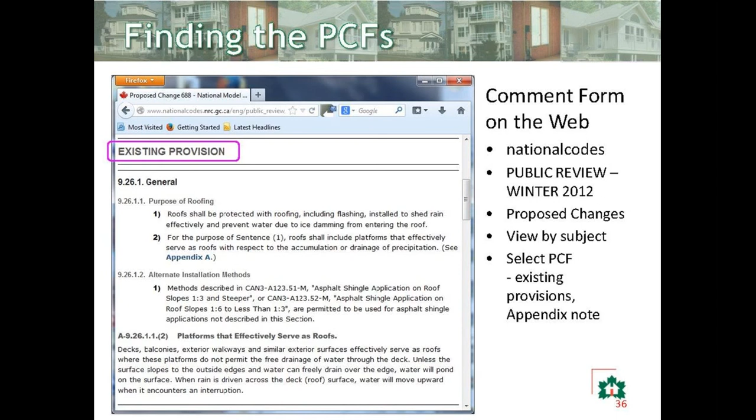In some cases, you'll also see a section titled Previously Approved Proposed Change. This comes where a proposed change has been approved through a public review earlier this cycle, but it hasn't been published in the code yet. So we're sort of building changes on top of changes.

So next, the change form will show the proposed change itself. They're presented in standard markup format, red crossouts, green underlines for new material.

You'll notice also that if there's a change to a related appendix note, that appendix note is provided on the same proposed change form as the referencing provision. You'll also notice that there are 2 sets of numbers for everything.

At the top on this form, you'll see 9.26.1 in black, and that's the existing code reference. And the numbers on the left in green and square brackets are the numbers that will apply to each of the provisions if the change is approved. So these would be the 2015 provision numbers. Where a provision is brand new, you'll only see the numbers in square brackets.

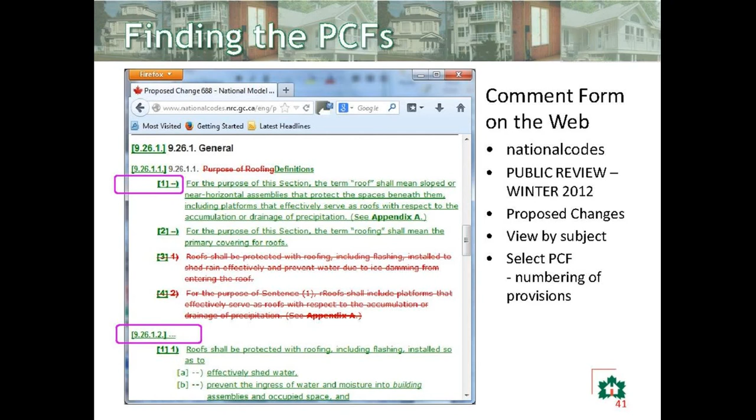Following the change itself is the rationale: identification of the problem, a justification or explanation of the solution that's being proposed, some information on cost and enforcement implications, and then an identification of who would be affected by the change.

And then at the very bottom of the proposed change form is the objective-based analysis. So if you're a real glutton for punishment, you can check and see what the new requirements are attributed to in terms of functional statements and objectives.

Introduction to the proposed changes, just a quick overview here. This list is a listing of all the subjects of proposed changes to Part 9. You don't need to memorize this. We will be posting the presentation so you can look at all this later. And we're not going to look at all of those changes today.

In terms of commenting on the changes, there are 5 options: support, support with comments, support with modifications, do not support, and no opinion. Now, as far as the standing committee is concerned, the first and last options aren't particularly helpful to them. It doesn't change anything in their discussion. So if you're going to provide comments, I'd suggest that you select from one of the remaining 3.

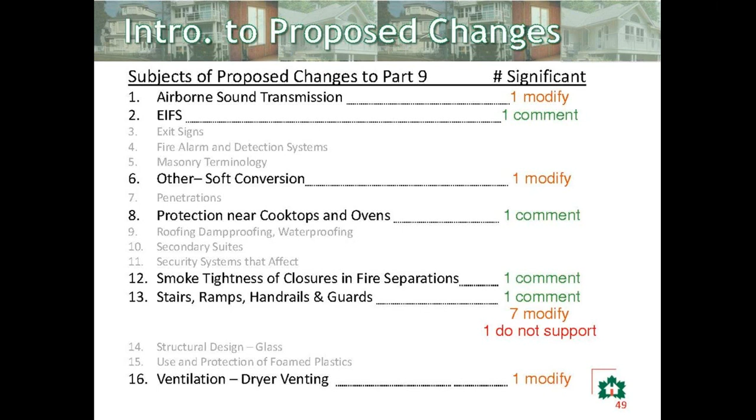I'm also going to mention one Part 3 change because it's referenced by Part 9. Specifically, Part 9 references an appendix note that's part of this change. And then finally, on combustible construction, there are 41 proposed changes on this subject, as I mentioned, provided in Parts 3, 4, and 5 of the National Building Code and also in the National Fire Code. We're really only concerned with 2 of those, so we'll just have a look at those.

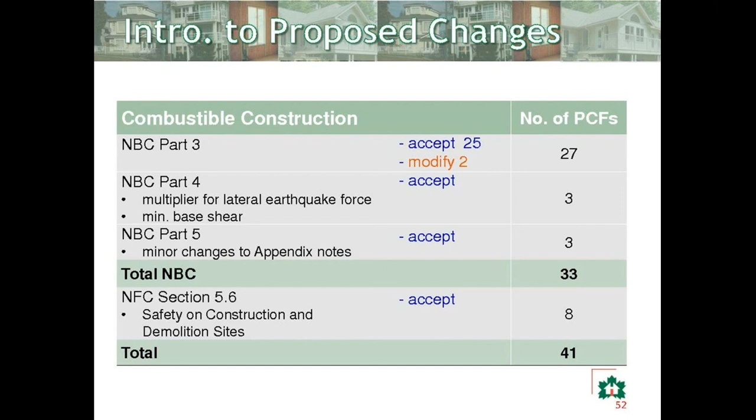So now into the nitty-gritty, or just about. I just want to take a minute and mention how the slides are formatted, just to help understand what's being presented. The text at the very top of the slide is the subject of the proposed change, and it should be the same words as the subject that you find on the code's website. Underneath that is a code reference, and again, it should be the same as what's on the website to identify the code reference for change. Then the proposed change form number and subject, again, mirroring what's on the website.

And then under that, I will identify the issue that's addressed by the proposed change form and the solution that's being proposed. I'll provide a little outline of what's in the change, identify the problems with it, in some cases suggest a revision, and then at the bottom of every slide is a link to that specific proposed change, so you can find those if you want to go direct to a particular change form.

So the first subject is airborne sound transmission. The problem that's addressed by the proposed change is that the current requirements that specify minimum sound transmission class don't address flanking sound. Trying to improve performance simply by increasing STC can be very expensive and often doesn't work very well.

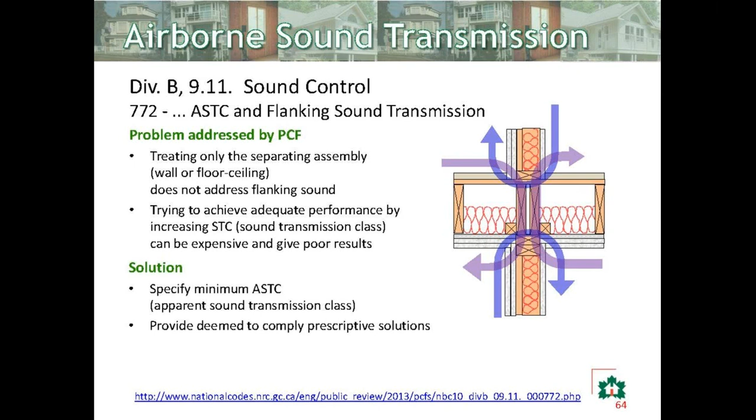So the solution is to specify a minimum ASTC, which is apparent sound transmission class, and to also provide some deemed to comply prescriptive solutions. So what the change does is it specifies required minimum protection to address flanking. In the general case, that's a minimum ASTC of 47 decibels, or a minimum STC of 50, which is in the code right now, plus some prescriptive construction criteria. For dwellings in houses with secondary suites, the criteria are a little less stringent.

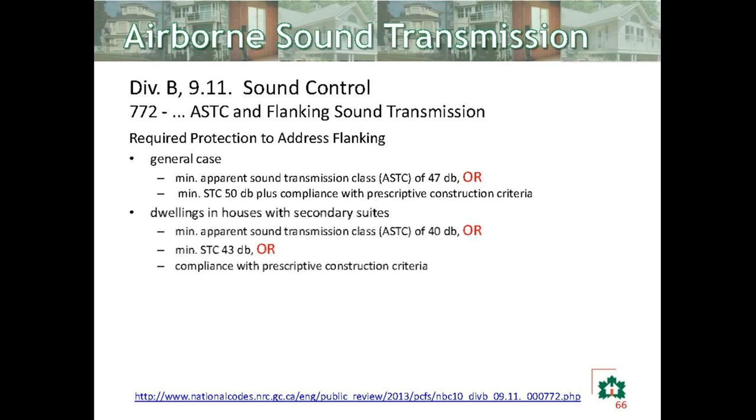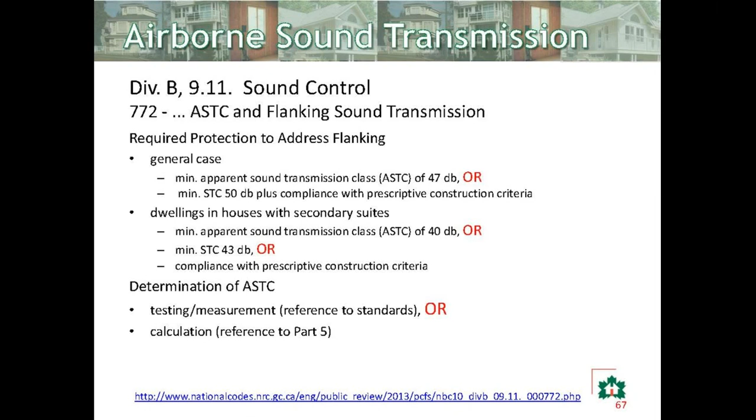The proposed change specifies how ASTC is to be determined. The options are testing, or what is called measurement in the proposed change, or calculation, which is essentially a reference to Part 5. The change states how to demonstrate compliance with an ASTC rating, which again can be through testing or calculation, or by constructing assemblies according to some prescriptive requirements that describe the treatment of flanking assemblies depending on what your separating assembly is.

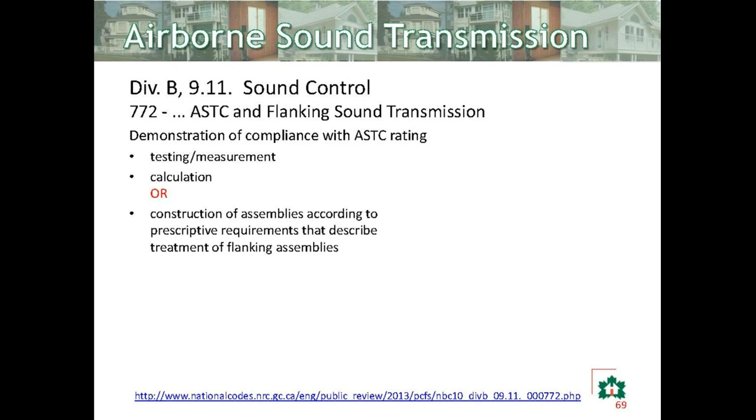So for example, if you have side-by-side dwelling units, your wall is your separating assembly, and if that assembly is a double stud wall and the subfloor is not continuous under that wall, then you don't have to do anything else. On the other hand, if you have a single stud wall and your subfloor is continuous under that wall, then you'll be required to add topping on the subfloor in order to comply with the ASTC requirement. The proposed change also includes updates to the appendix note to provide more information on flanking and on deemed to comply assemblies.

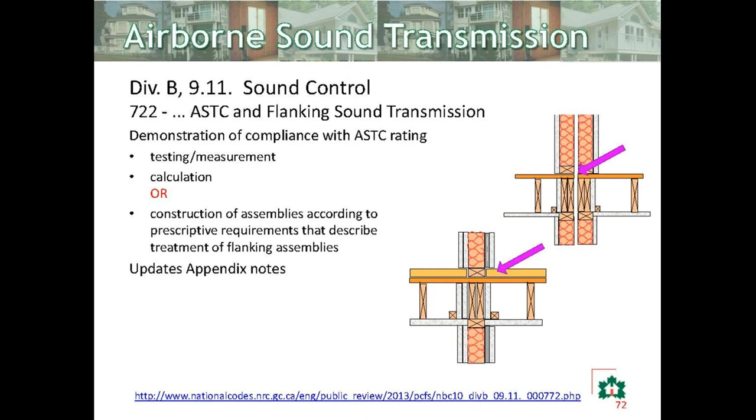So, what's wrong with the thing? Well, not a whole lot, actually. There was an awful lot of work that went into developing these changes, and considerable attention paid to comments from builders on the committee. The real difficulty is essentially editorial, but there are technical implications.

There are two issues with this one. The first is that in the requirements that provide the prescriptive construction information, the subclause refers to the topping and finished flooring complying with a certain table. When you look at the table, actually in some cases they require topping, in some cases they require specific finished flooring, in some cases there is no additional requirement for either. So it just needs to be clearer that it's topping and or neither. It's just really an editorial thing, but it can be confusing if it's not clear that it's one or the other or none.

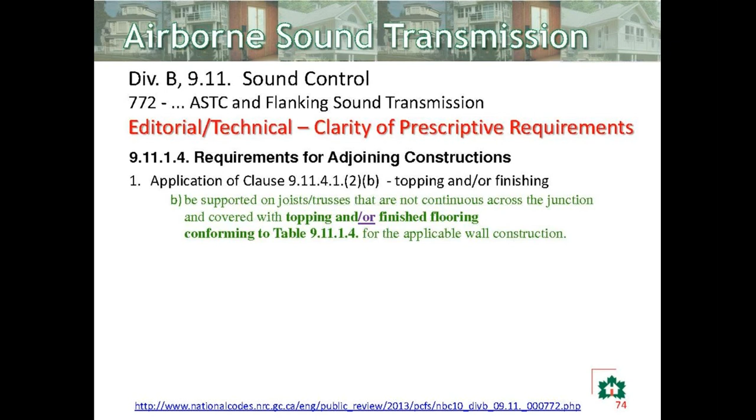The second issue is in the table itself that describes what needs to be done to the adjoining assemblies when your separating walls are W13, 14, or 15. Those are the numbers in the current fire and sound resistance tables, and those walls are double stud walls. The table provides instructions on what to do if your subfloor is continuous under the wall, but it doesn't say what to do if there's no continuous subfloor. So it raises the question of, well, do you have to do nothing, or is this not even permitted? So that just needs to be clarified. Makes a big difference.

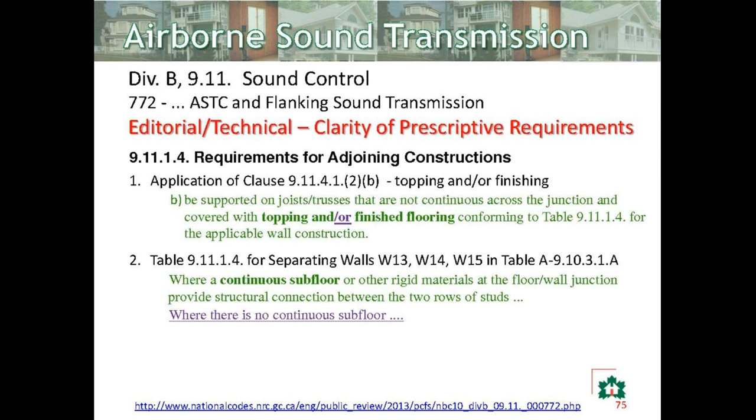The next issue I'd like to look at is exterior insulation and finish systems. At the moment, EIFS is not recognized in Part 9, so the solution proposed is to provide some requirements.

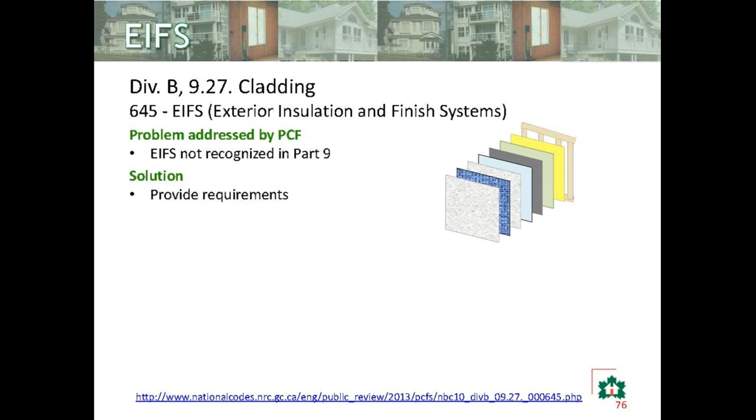The proposal would accept EIFS as cladding on wood frame, masonry, steel stud, and cast-in-place concrete walls, and it requires compliance with a number of other subsections in the code or Part 5.

There's a provision under 9.27.2.2 on minimum protection that indicates that if you install EIFS according to a new subsection 9.27.13, that installation is deemed to provide a capillary break.

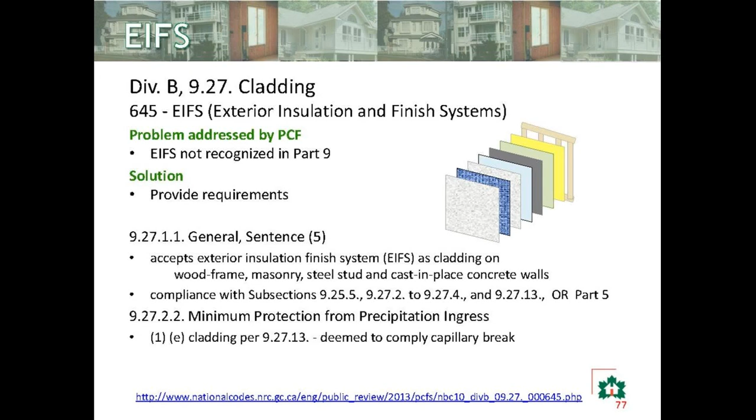And if we look at 9.27.13, the proposed change indicates that EIFS can be used under Part 9, provided it complies with the ULC standard, and also provided there's a drainage cavity. It then specifies a number of standards that must be followed for materials, design, and installation.

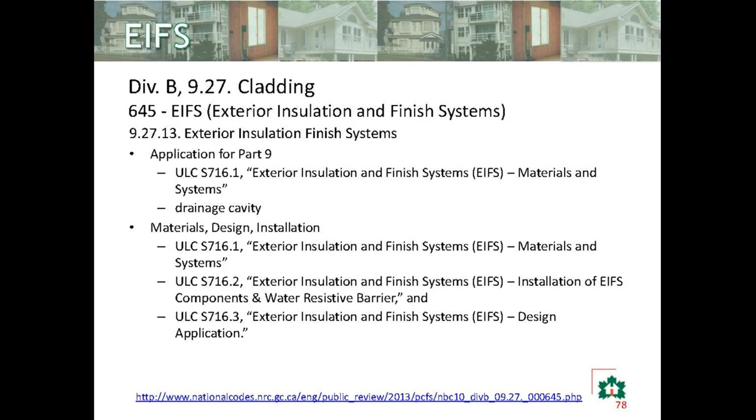So, concerns with this have to do with the performance of that drainage cavity. The provision says that the cavity has to be a minimum depth of 6 millimeters with an open area of not less than 13% of the full area of the EIFS panel.

Now, the reason we're concerned about this is that if we compare this with all the other drainage cavity requirements for other types of assemblies, the criteria are quite a bit more stringent. Rather than 6 millimeter cavity depth, all the other ones are at least 10 millimeters. And for a simple drained and vented airspace, the code currently requires that be over the full area of the wall. If it's drainage material, we require a minimum 80% open.

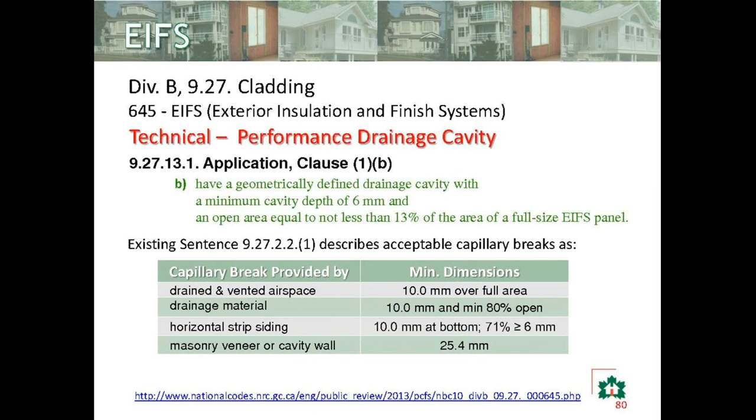So we'd like to be reassured that this 6 millimeters over 13% is actually going to provide adequate performance, especially in cases of warmer, wet climates, such as coastal British Columbia.

If we go back and look at the IRC Industry Consortium report on moisture in envelope systems, there are some concerns raised about the performance of EIFS in warm, wet climates. So we just need a little reassurance there that we're going to have minimum acceptable performance. Another leaky condo issue we don't need.

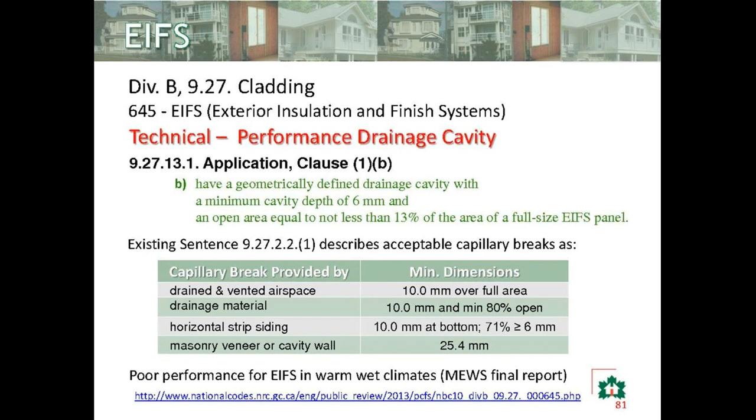The next subject is under this really informative heading of Other. There are quite a few proposed changes under that heading.

One of them is soft conversion. Every once in a while, the Code Centre gets an inquiry from someone saying, I install my studs at 16 inches on center, and that's further apart than what the code says. Because the code's in SI, and it's done a soft conversion of 16 inches to 400 millimeters, and 16 inches is really 406 millimeters. So the solution being proposed is to add an appendix note to identify deemed-to-comply imperial dimensions.

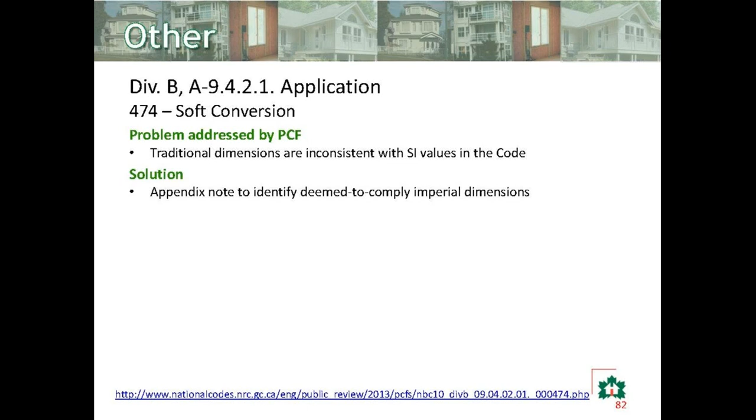This appendix note would be referenced from 3 different provisions in Part 9, and it currently addresses dimensions that are acceptable where these are hard conversions from imperial measures, but it only addresses spacing between framing elements, like studs.

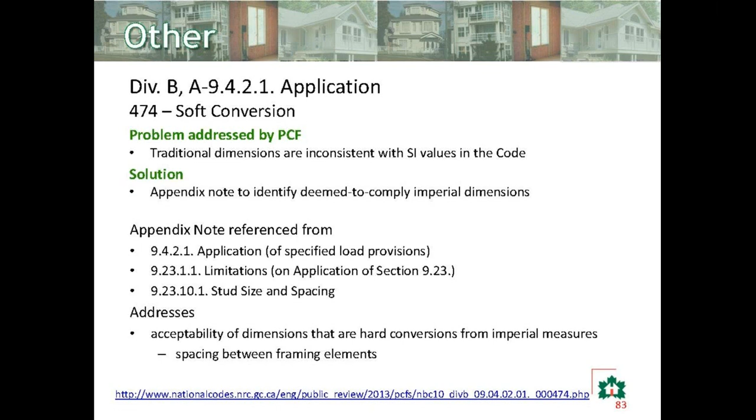So the concern we have with this, we actually have 2 concerns. The first is administrative. The fact that the information is provided in the appendix note means it's not enforceable. So it's useful information, but it has no legal standing when it's in the appendix.

The second is a question of scope. The proposed change addresses spacing of framing, but it's not clear if that includes strapping and furring. And it doesn't address other things such as the spacing of elements that depend on the spacing of framing, such as ties for masonry veneer, or dimensions that depend on traditional component dimensions, for example concrete block, which has implications for foundation thickness and also for spacing of reinforcing.

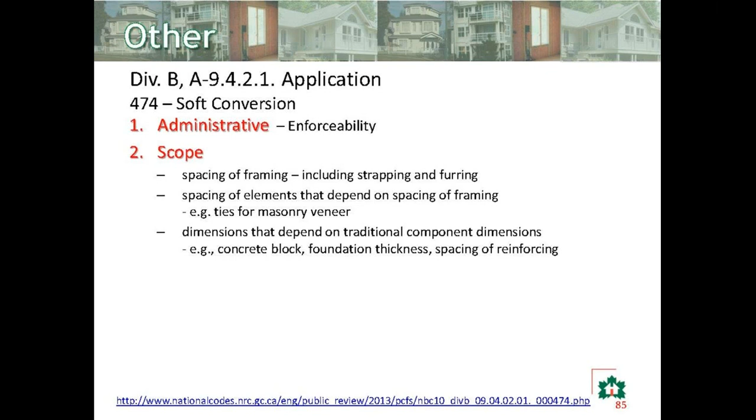The proposed change has a little conversion table in it to identify hard conversions that would be acceptable, but the table only goes up to 24 inches. With a quick review of Part 9, I've identified values up to 72 that I think the change should address.

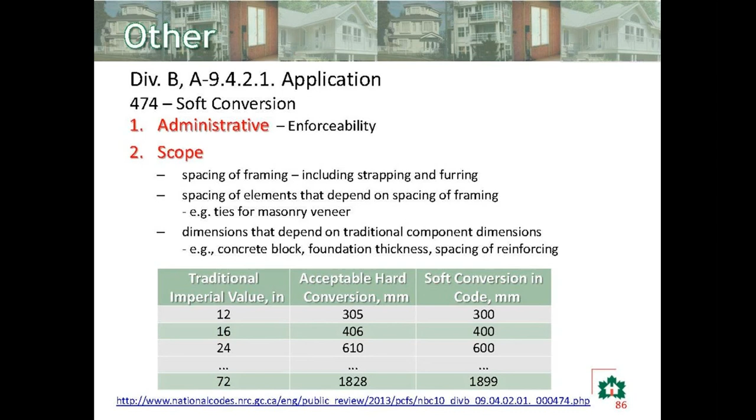Next issue is protection near cooktops and ovens. This issue arose as a result of problems with interpretation in the application of the existing requirement.

Just to give you a little background on that, this illustration shows a standard kitchen cabinet setup. I've actually shown 2 kitchens back to back against a common wall just so that my illustration doesn't get too cluttered up. So we've got standard 3-foot high lower units, 29.5 inches clear to unprotected cabinets.

Of course, we generally protect the cabinets with a hood, and then we can bring the cabinets down to 24 inches. A certain authority was imposing the unprotected cabinet height on microwave ovens installed over cooktops, which meant these were installed almost 5.5 feet above the floor. Obviously not very practical and actually rather dangerous.

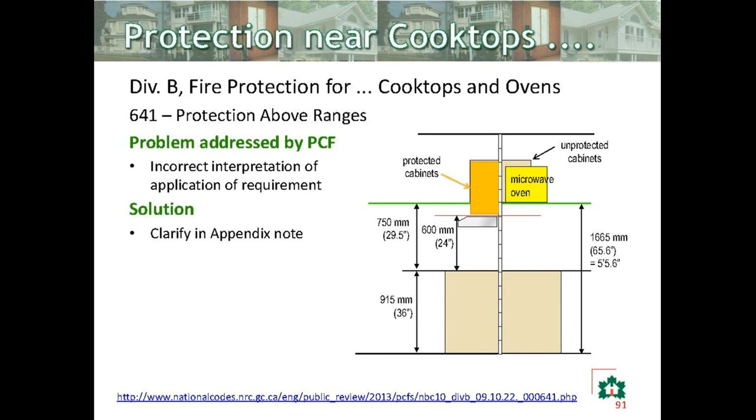So the solution is to clarify the application of the requirement in an appendix note. The note, as written, clarifies that the clearances specified in 9.10.22.2 only apply to combustible framing, finishes, and cabinetry. They don't apply to microwave ovens installed over cooktops. The appendix note explains that these microwave ovens should only be installed according to the manufacturer's instructions, and if the instructions include installation over a cooktop, then the oven will have been tested accordingly.

So we don't need any special requirements for this, just follow the manufacturer's instructions. And we would suggest supporting this proposed change because it really does clarify some problems that some builders have been running into.

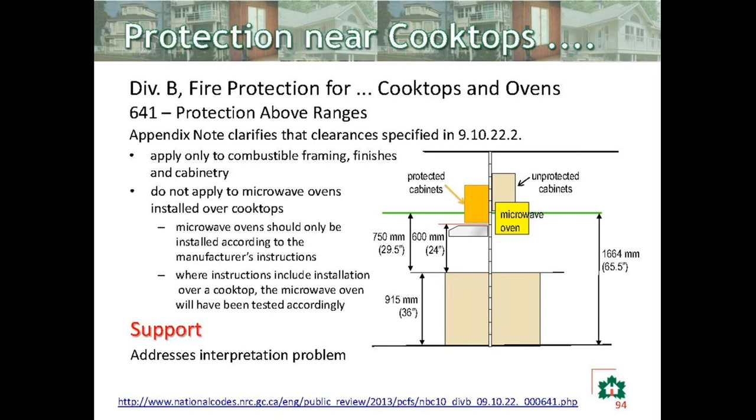Next subject is smoke tightness of closures. Right now, the code requires fire dampers in ducts and air transfer openings that run through fire separations. That's all very well and good, but actually smoke is a bigger problem than fire. So the solution proposed is to require smoke dampers in air transfer openings.

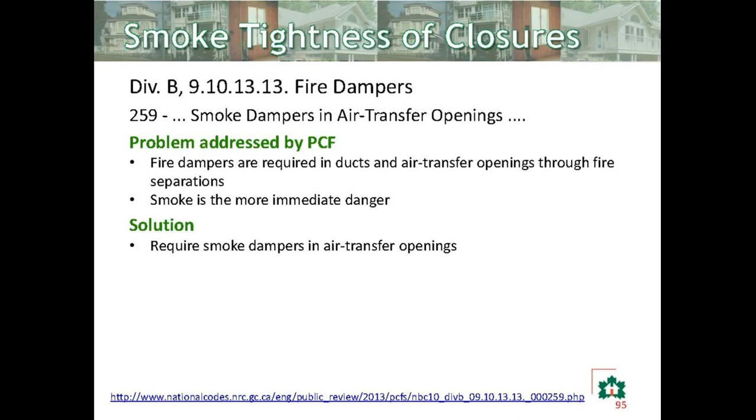So there's a revision to Part 9 that references Part 3 for fire dampers. At the moment, those requirements are in Part 9. We're just taking them out of Part 9 and referring to the requirements in Part 3. There's no technical change there.

Secondly, the proposed change references Part 3 for smoke dampers in air transfer openings through fire separations. That's the new piece. It also provides an appendix note to make clear that smoke dampers are not required in ducts in Part 9 buildings. They are required in Part 3, so you just want to make sure that people are clear that the dampers in ducts are not required in Part 9.

The issue here is really a question to you, and we're hoping you might be able to help us out as to whether there's any real issue here or not. I don't know whether air transfer openings are even used anymore. And if they are, does the code need a definition for these so that we know what we're talking about and what the requirement actually applies to?

Stairs, ramps, handrails, and guards. There are quite a few changes here, and quite a few of them we have suggested comments on.

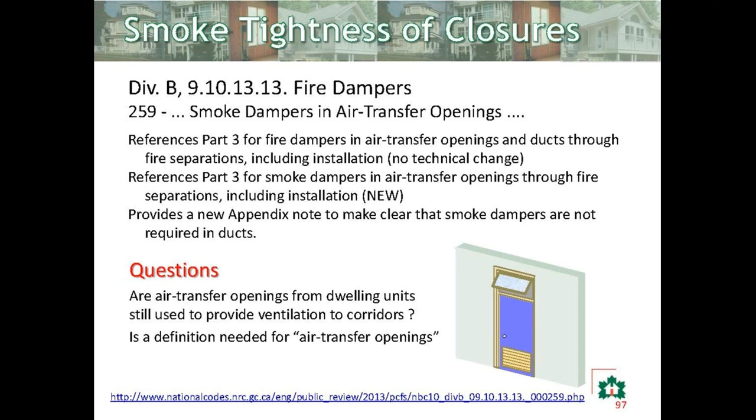First one is a defined term for flight. There are a number of requirements that refer to the length of stair flights, so we need to be clear on what is meant by the word flight. So the solution is to provide a definition. The proposed change actually provides not just a definition, but also an appendix note with an illustration.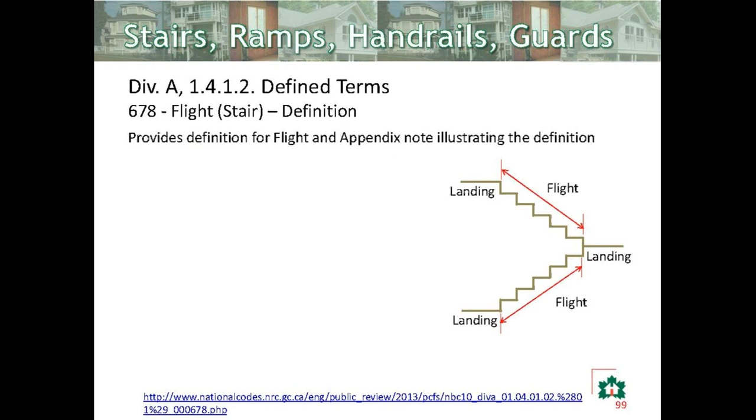This is great, except we still don't really know what a flight is, because the illustration doesn't show any nosings on the treads. So if you have nosings, does the flight include the nosing on the top at the landing? Does it include it on the bottom tread? It's not at all clear. So you don't really know where the flight starts and ends, so you don't know, for example, where a handrail has to start and end.

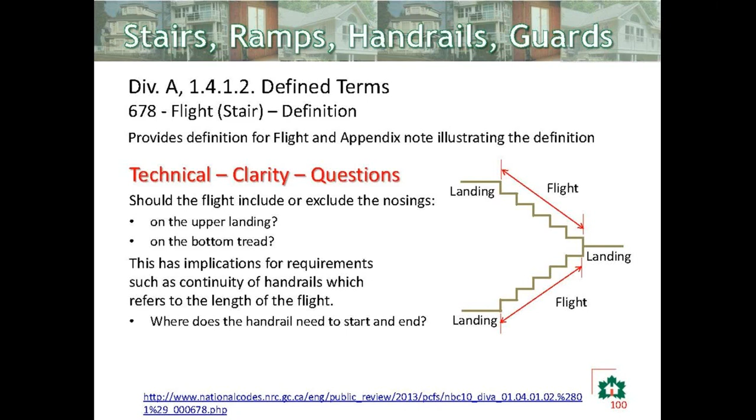So we're raising that issue in the comments. Next, I'm going to talk about two proposed change forms at the same time because the difficulties with them are the same. The proposed changes are meant to address consistency in terminology, identify where the depth of a tread is to be measured, and one of them addresses the subject of deeper angled treads at the base of a mixed run stair, which is not currently allowed.

So the solution proposed change would make the terminology consistent, specify the dimension of the treads at the walking line on the inside of the curve, and allow deeper angled treads at the base of the stair.

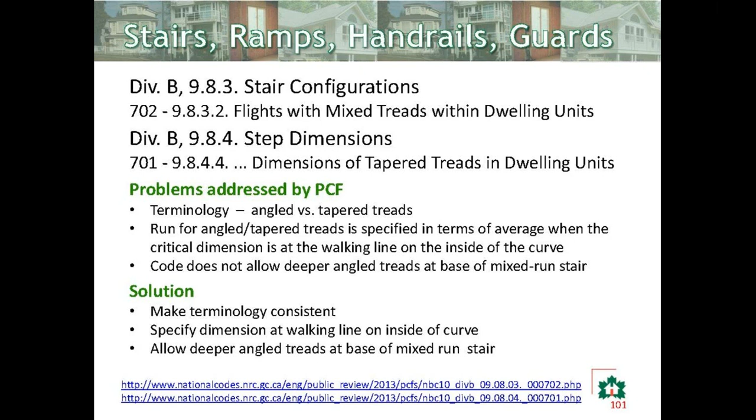So for this first change, flights with mixed treads within dwelling units would require uniformity of tapered and rectangular treads in a mixed run to be measured 300 millimeters from the center of the inside handrail. And for tapered treads at the bottom, it simply allows the tread of the tapered tread to exceed the run of the rectangular treads.

For the second proposed change form, 9844, the change would specify a run at the narrow end of the tread, again specify minimum run, measured 300 millimeters from the center of the handrail at the narrow end of the tread, requires consistent angle, and it talks about measurement of tolerances.

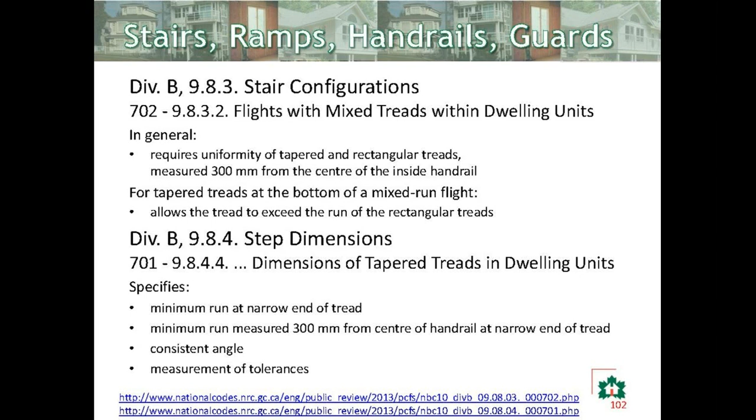The difficulty here is really where to measure. The changes specify 300 millimeters from the center of the handrail, but they refer to handrails on the inside of stairs that are curved and have mixed runs. The problem is there's no requirement right now to have a handrail on the inside of the curve, so they're assuming a proposed change to do that will be accepted, and we have some difficulties with that. The other issue is there's an exception for winders, so if you have a flight with winders, you're allowed to have the handrail on the outside.

There may be no handrail on the inside from which to measure. So the suggestion is that the two proposed changes be reworded so that the tread is measured from the handrail where there is one, and measured from the end of the tread where there isn't. There's quite a bit of duplication in the requirements, so where that duplication appears, we're suggesting you just refer to the previous sentence instead of restating things all over again.

You may notice on the way by that there's also a proposed change for 9.8.4.3 dimensions of tapered treads in public stairs that reads the same as the change we just looked at. But in this case there's no problem, because for public stairs that are curved, you have to have handrails on both sides anyway, so there will be a handrail to measure from.

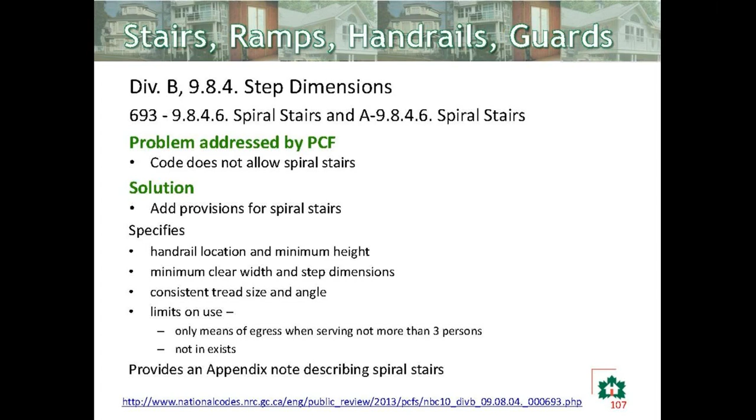The problem with this, first, is a matter of consistency. The task group that developed the proposed changes was quite adamant that the measurement of tread depth should be at the walking line, but for some reason when they got to spiral stairs, they're measuring at the narrow edge. If it's so important to measure at the walking line, I think they should probably do that for spiral stairs as well.

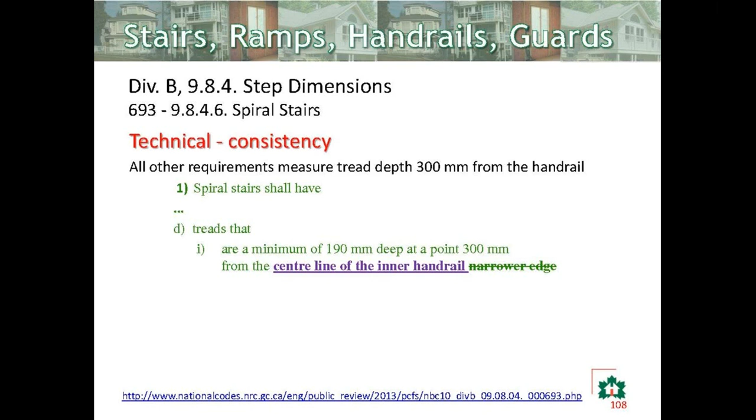The second problem is that the appendix note describes a typical structure of a spiral stair rather than the properties that affect safety and use, which is what the code is really concerned about. So the appendix note as proposed says that the spiral stair is a stair with a circular plan having uniform treads that radiate from and wind around a central post or supporting column.

Obviously you could have a curved stair that's structurally built the same way, or you could have a spiral stair that meets all the requirements in the body of the code that doesn't have a central column. So that structural piece of information isn't particularly helpful. I think if they're going to have an appendix note to describe what these are about, they really should be talking about the code criteria rather than the structure.

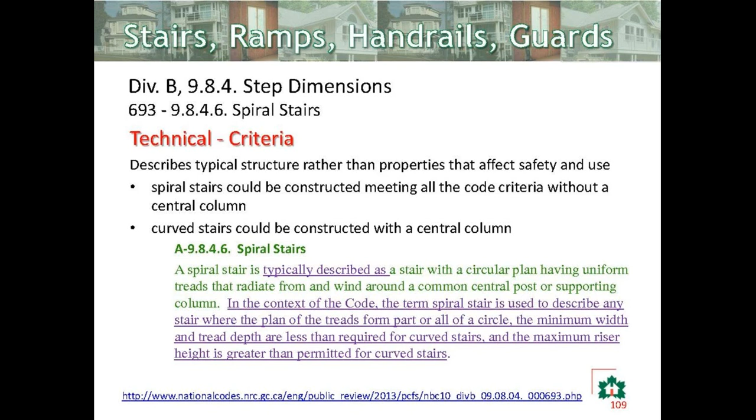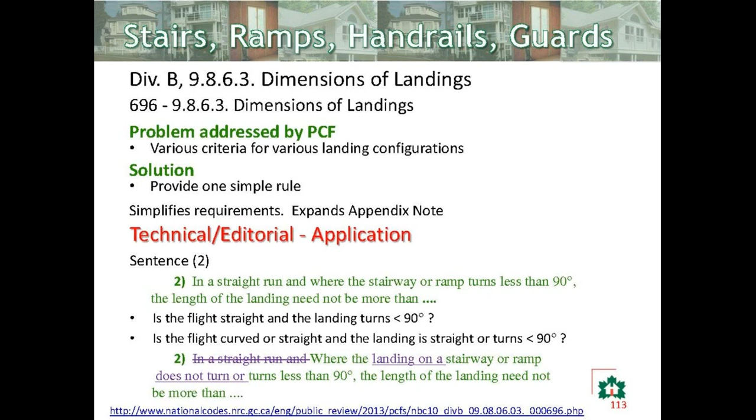Again, kind of an editorial issue, but major technical implications. This becomes very confusing very quickly. The way the requirements are written, sentence 2 on the path of travel is an exception to sentence 1,

which is a sentence that specifies the number of handrails required. So it suggests that you're allowed to put a handrail not more than 750 millimeters from the path of travel instead of handrails at the sides of the stair or ramp. I don't think that's quite what they meant to do. And if it's okay to have a handrail down the middle of a stair or not on the edge, which may be quite reasonable for an exterior stair, then why can't you do that for stairs serving single dwelling units?

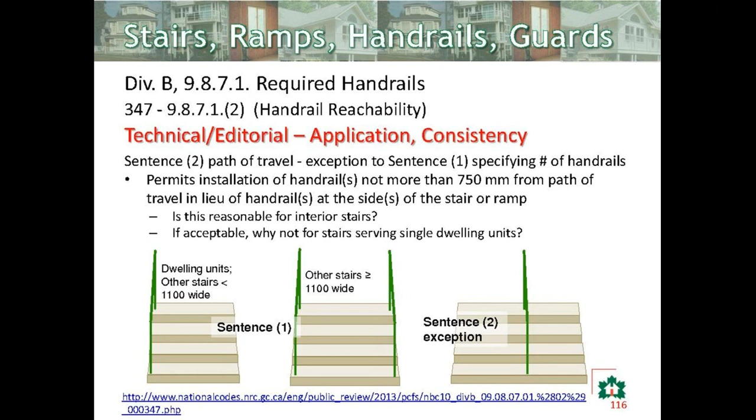The second difficulty is this term 'direct path of travel.' There'll be cases where the most direct path of travel might actually be diagonally up a stair. Obviously, that's not what they meant. If you imagine a curved stair, a direct path of travel might take you from one side of the stair to the other and back again.

So I think there's a little problem with the wording. The appendix note in Part 3 refers to the natural path of travel, which is probably a better description of what they're trying to get at.

If we look at the Part 3 requirement, and keeping in mind that the committees tried to eliminate differences between Part 3 and Part 9, the requirement starts by specifying that you have to have handrails on 2 sides. Remember, this is public stairs from Part 3. Sentence 3 would require additional handrails, so this is in addition, not instead of, as the Part 9 requirement reads.

Their sentence 4 would require the handrails, again, along the direct path of travel. That term's problematic. But when you look at the appendix note, it refers to natural path of travel, and it also suggests that the handrails are only required on the natural path as opposed to in addition, and it refers to stairs to and from the building, which makes one wonder if this is really only supposed to apply to exterior stairs, but that's not what the requirements say.

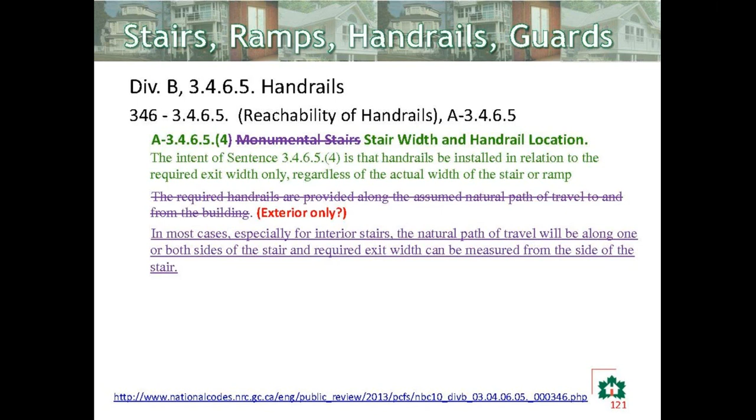One might note that for interior stairs, you'd expect the natural path of travel to be toward the side of the stair, and so you can measure your exit width from the side. And where you're talking about exterior stairs, you might have handrails just down the middle somewhere, and you may not need handrails on the sides. Again, the requirements are not clear, and they need to be made clear.

And a final observation is that by installing a handrail somewhere within the stair, you're actually defining a path of travel. So a whole number of issues here that I think warrant some further thought.

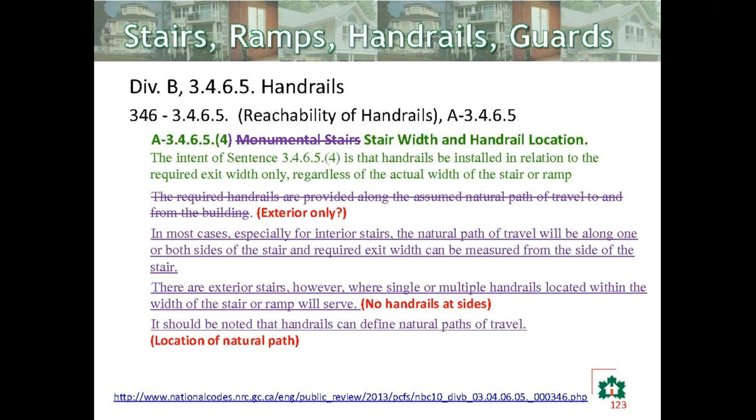This next proposed change is the one that caused problems in terms of measurement of your tread depth relative to the handrail. This is the change that would require the handrail to be installed on the inside of curved stairs and stairs with mixed treads. And it also provides, as I mentioned, an exception for winders, so you could have the handrail on the outside of the stair.

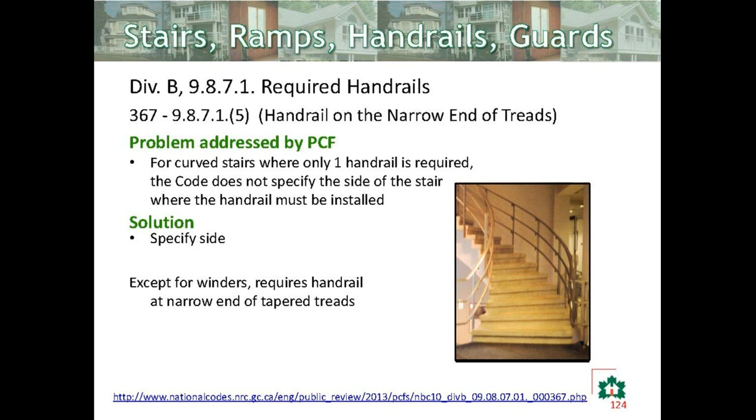So we would support the exception to allow the handrail to be on the outside for winders. You can put the handrail anywhere you want, as far as we're concerned. But there are problems with the justification and the costing on this proposed change. The justification only refers to consistency of tread depth at the walking line. Now, for a curved stair, the tread depth at the outside of the stair is going to be consistent, just the same as it should be consistent anywhere.

So the rationale for requiring the handrail to be on the inside just doesn't apply. For costing, the proposed change doesn't identify any cost implications, but you can imagine that if you have a case where you have a wall on the inside of the curved stair and a guard handrail on the outside, on the wide side, this change will actually require you to add a handrail on the inside. So there will be cost implications, and those should be recognized.

Continuity of handrails. The requirements at the moment allow breaks in handrails at doorways, obviously on landings. Although I was in a building recently where there was a doorway on a winder tread, so you never know. Breaks at newels, at changes in direction, and for dwelling units and houses with secondary suites, you are also allowed to break your handrails at the landings.

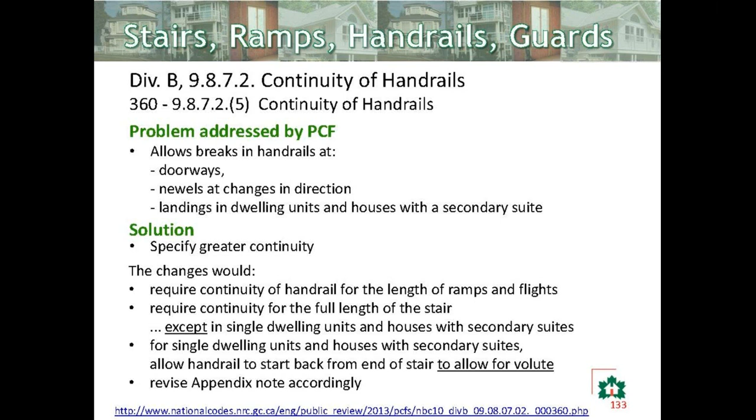Problems with this, for stairs other than single dwelling units or houses with secondary suites, we've identified problems with the application of the requirements, the justification, the costing, and also the attributed objectives. For the application, as written, the change would require continuity at landings where there's a change in direction, but not for landings that don't turn, which doesn't seem to make a lot of sense. If you want continuity, you should have continuity.

In the justification, we find that the current wording of the requirement is actually consistent with the intent statement, which is to limit the probability of unexpected discontinuity. And I would expect newel posts at certain places on stairs. So if we're going to change the requirement, we also need to change the intent, and that hasn't been done.

On costing, again, it's this issue, changes in costs have not been recognized, and again, we have a situation that the requirement would require an additional handrail where there's a wall on the inside of the stair and a guard on the outside.

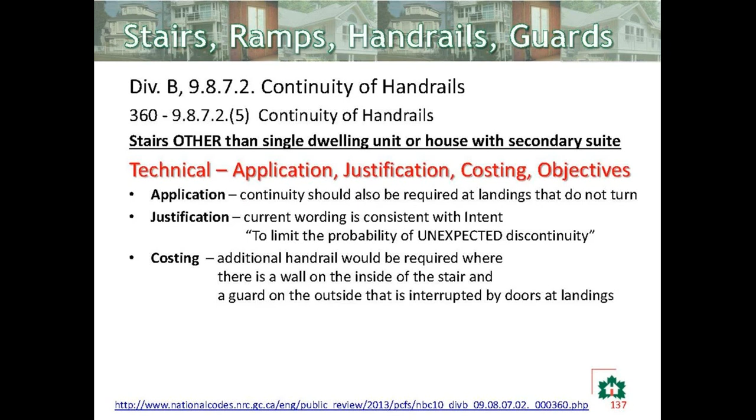And objectives. This proposed change, there's a new attribution to the barrier-free objective and the functional statement that relates to access and circulation in the building. Now, both the objective and the functional statement have references to other provisions for limitations on the application.

And if we look at those, we find that this objective and the functional statements do not apply to detached houses, semi-detached houses, houses with secondary suites, duplexes, triplexes, townhouses, row houses, and boarding houses. So to all of a sudden apply these objectives and functional statements to cases other than single dwelling units and houses with secondary suites creates an inherent contradiction within the code. So that is really problematic.

You might also recall that there's a provision in Section 9.5 that says that if your building doesn't have an elevator, then you don't have to provide a barrier-free path of travel anywhere except at the entrance level to the building. And if you've got a split entry, you don't have to provide a barrier-free path of travel anywhere. So, in fact, in terms of barrier-free path of travel, those objectives and functional statements also would not apply in these buildings. So we've got to sort out this whole issue of where barrier-free does or doesn't apply in Part 9 before we start attributing this objective and functional statement to any provisions in Part 9.

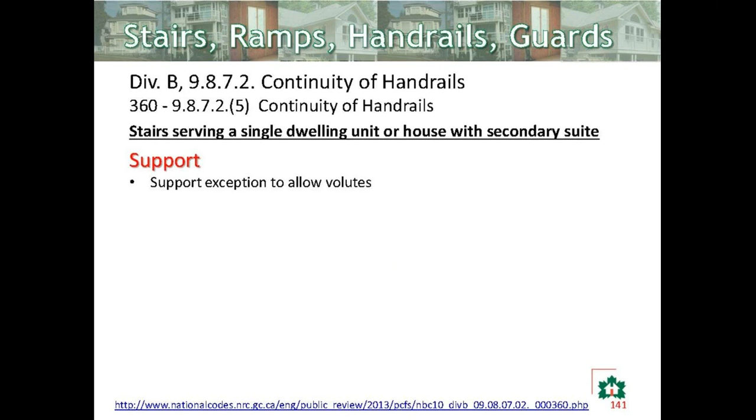And we suggest that this really needs to be dealt with at the policy level by the Commission. So we would support the change to allow volutes in single dwelling units and houses with secondary suites, but we still have trouble with the criteria and the justification and the costing for other aspects of the proposed change.

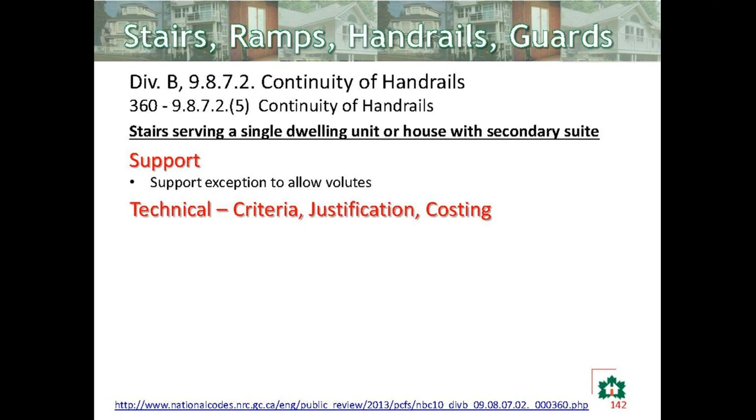This is a question of consistency with the intent, and the current requirement is consistent with the intent to limit the probability of unexpected discontinuity, and again with costing. If you can have a break in your handrail at a newel post, you can put the newel post on the inside of a stair with a winder, and that's fairly straightforward. But if you're not allowing a newel post in the flight, you either need a continuous handrail on the narrow side, which is complicated and costly to build, or install it on the outside, which makes the handrail longer and costs more. None of that is recognized in the proposal.

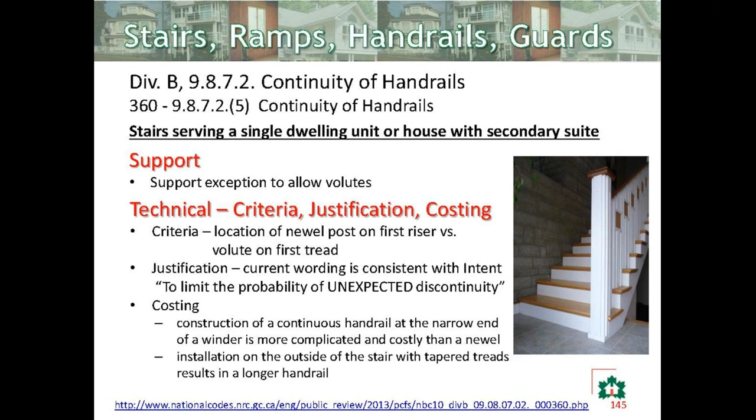So we're suggesting that the exception for newel posts at changes in direction be put back into the requirements, and that the provision referring to newel posts and volutes be revised so that it refers, in both cases, to installation on the bottom tread.

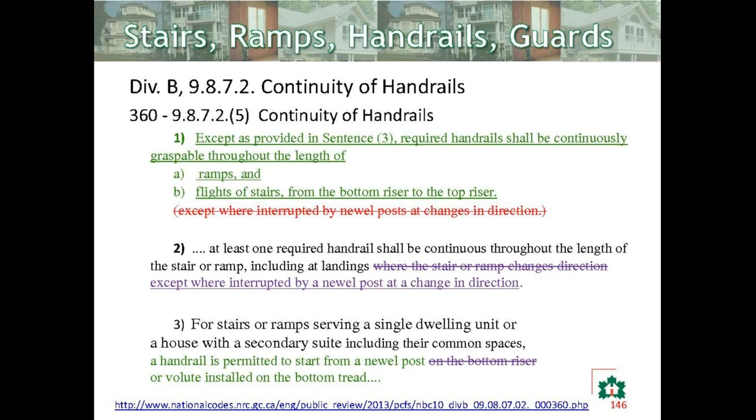Design of guards not to facilitate climbing has been a real contentious issue for quite a while. The problem with the current requirements is there's no justification for them, and they have a real adverse impact on design freedom and on the industry that manufactures guards. So the solution is to limit the application of the requirement and remove the prescriptive criteria from the code.

The proposed change would apply the requirement only where the difference in height between floor levels is more than one story or more than 4.2 meters, whichever is less. It would also update the appendix note accordingly and incorporate the information on the deemed-to-comply solutions currently in the body of the code into that appendix note.

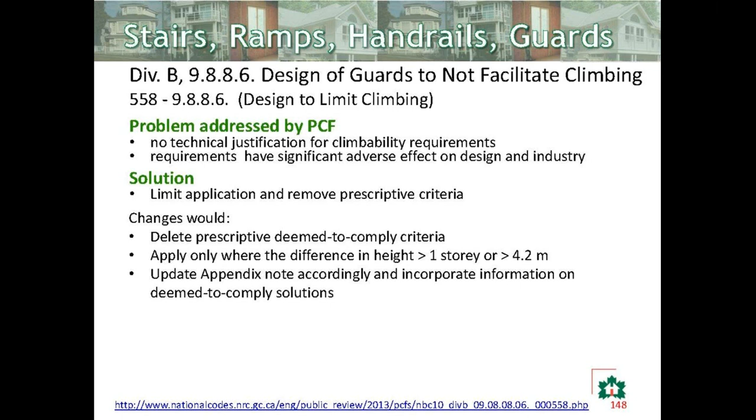It's not perfect. As I said, there's really no information to justify any requirement at all, but people seem to be nervous about taking the requirement out completely. Still, it's a definite step in the right direction, so we'd suggest it be supported, and we can work on it further in the future.

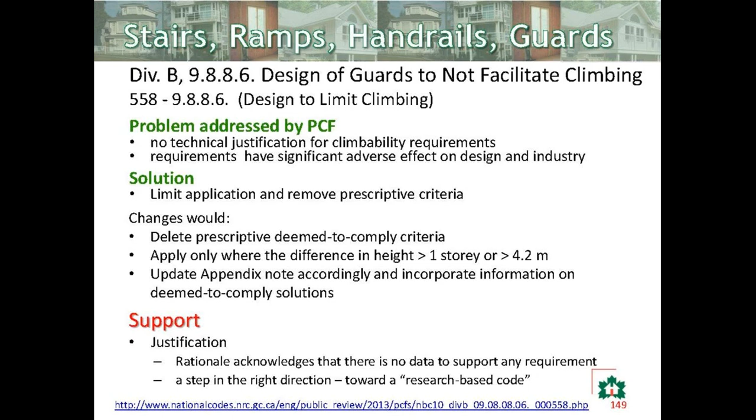The final proposed change to Part 9 we'll look at is venting of laundry drying equipment. At the moment there are no requirements in Part 9, and there have been concerns about high humidity if the dryer is vented to the interior, particulates released into the air, and fire hazards if the ducting isn't cleaned. So the proposal is to provide requirements specifying that discharge has to be to the outdoors, with independence of the ducting.

Ducts have to be accessible for cleaning and corrosion resistant. Where there are multiple installations, you'd need a common duct with a central exhaust fan, a lint trap, and make-up air according to 9.32.

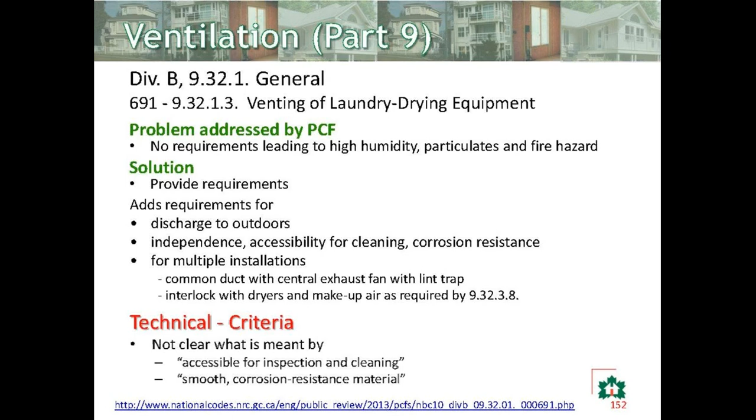There are no really serious problems with this, but it's not quite clear what is meant by accessible for inspection and cleaning. I'm concerned someone will say you've got to be able to see the outside of the duct as well as the inside, which is obviously impractical. It's also not necessarily clear what is meant by smooth, corrosion-resistant material. So the suggestion is to take inspection out of the proposed change.

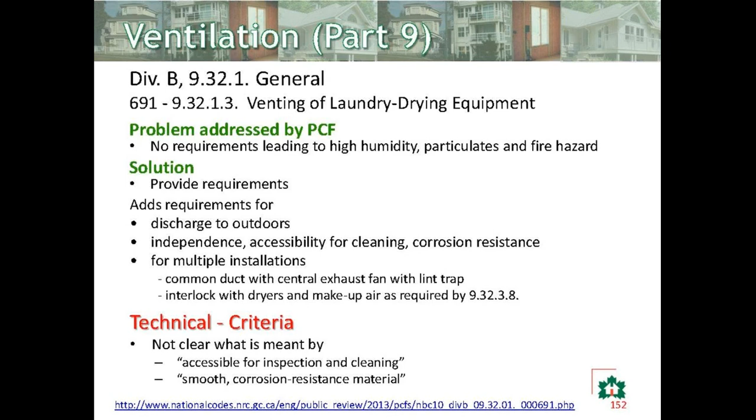If the duct is accessible for cleaning, it's probably accessible enough for inspection. An appendix note might be useful to indicate what is acceptable dryer ducting, and to note that plastic ducting is still acceptable for connecting dryers to the galvanized metal.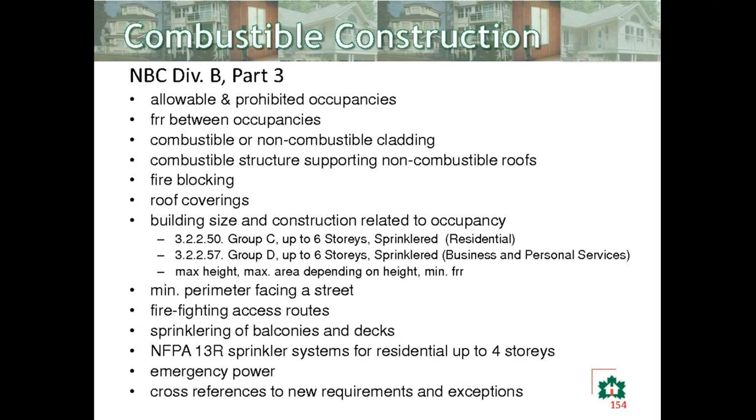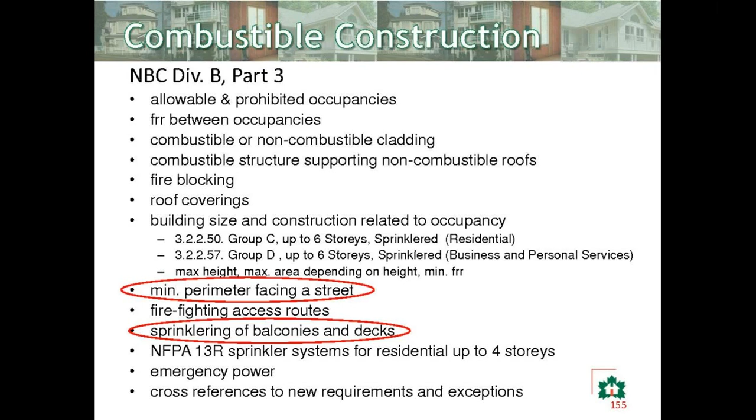I want to look at two: one on minimum perimeters and one on sprinklering. At the moment, where a building is required to face a single street, there's no indication of how much of the building has to face that street. So the proposal is to specify a minimum value of 25%. I understand CHBA is doing research to see whether this is unnecessarily stringent or acceptable, so if anybody has information on that issue, please pass it on to CHBA.

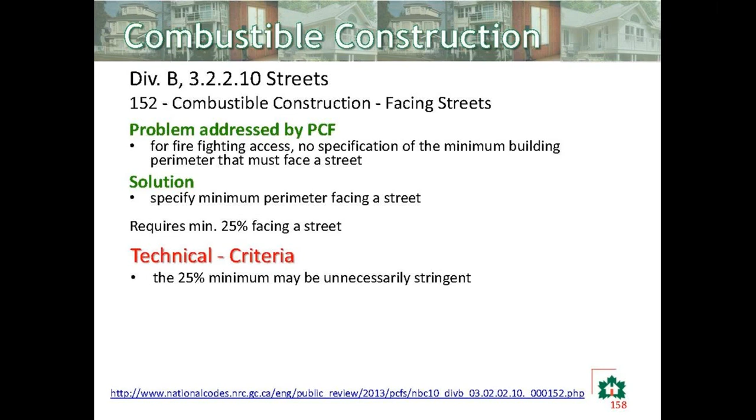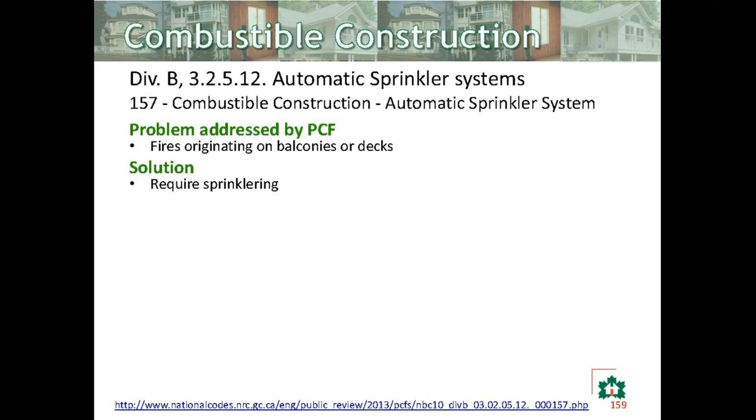The second proposed change has to do with sprinklering, addressing fires that might originate on balconies or decks. The solution is to require sprinklering where the balcony or deck is greater than 610 millimeters deep. My concern is that the application is too broad.

If you're talking about a roof deck where the higher structures are only enclosures for elevator machinery or similar, I'm not sure you really need sprinklers, especially if the cladding is non-combustible. Similarly, if there are no overhanging structures or soffits, I'm not sure this is necessary. Or if there are overhanging structures but they're a certain distance from a sprinklered area, then requiring sprinklering would seem a bit excessive.